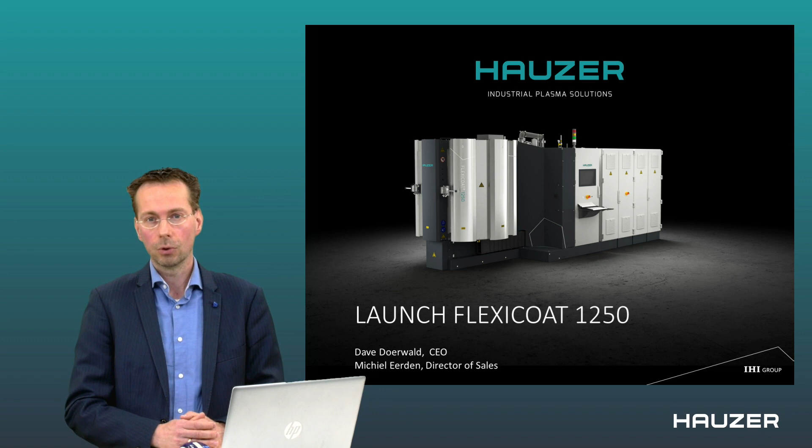Today this is not possible, unfortunately, but we hope that in this way, with this webinar, we are able to introduce today the latest member of our Hauzer Flexicoat family, the Flexicoat 1250. So we would like to introduce this system today.

First, we will start with some introduction and some words by our CEO Dave Doerwald, after which I will say a little bit more about the reasons why we came to the development of the Flexicoat 1250 and the specific features of the system. So with this, I'd like to give the word to Dave Doerwald, who will give a little bit more words about Hauzer and a warm welcome from his side.

Thank you, Michiel, and also a warm welcome to everybody from my side. Really excited to have you here this morning, joining us for this webinar, where we would like to present our latest equipment platform, the Flexicoat 1250. Normally we would present this new equipment to you in one of the many conferences that are happening during this time of the year. Unfortunately, this is not the case, so we have looked for alternative ways to introduce the new technology here today.

As we all know, COVID-19 has a big impact on our lives today, all over the world. We are restricted from traveling, from meeting customers, from social interaction, and therefore I'm happy today that we can use new technologies here to be able to be close to our customers. I would like to thank you all for all the hard work and the efforts that you put into overcoming this virus, and especially also to the healthcare and critical businesses that make it possible to guide us through this situation. And hopefully we will be able to meet again face to face very soon, so that we can have open and constructive discussions also about this new platform.

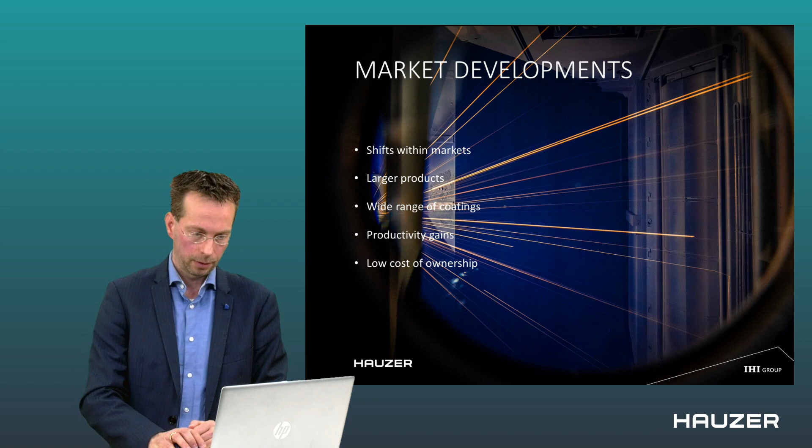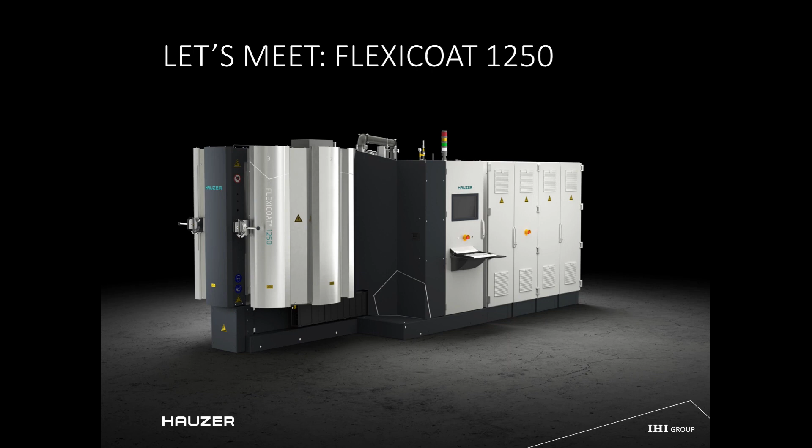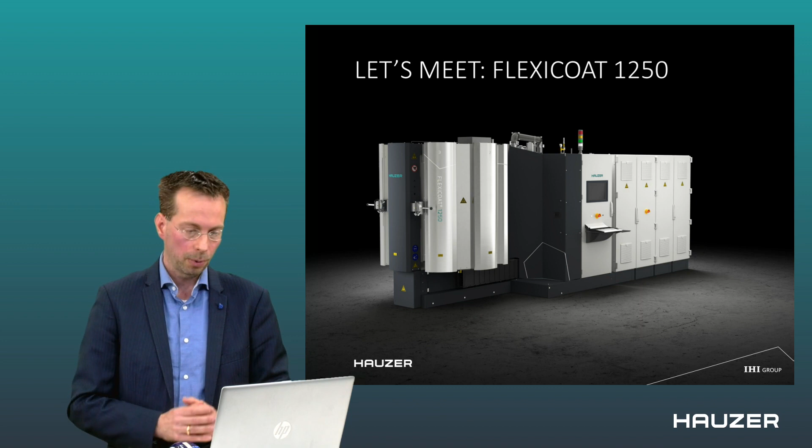It has maybe a somewhat similar look and feel to the existing Flexicoat series 1200, 1000 and 1500 machines, but there clearly are some differences, and these differences I would like to explain in somewhat more detail in the next couple of slides. The first of them is this one. What you can see here is our vacuum chamber. And this vacuum chamber again has a very high amount of flexibility.

What you see on this picture is that for each cathode position we can choose a certain flange. It can be a rectangular flange to make sure that we can use sputter cathodes, we can use rectangular arc, we can use 4 or 5 circular arc cathodes. We also have dedicated walls with 4 CARC+ cathodes to make sure that you make a dedicated machine. For the first time ever, we have an option to build a 7th cathode.

What you're looking at now from the front side is the turbo pump side. On the opposite side, again, we can have a flange. And this flange is available for additional technologies. What you see here is the vacuum chamber. It also means that if you choose a certain configuration today, it doesn't have to stay that way. We can always, like you're used to from Hauzer, upgrade systems with new or different technologies in the future.

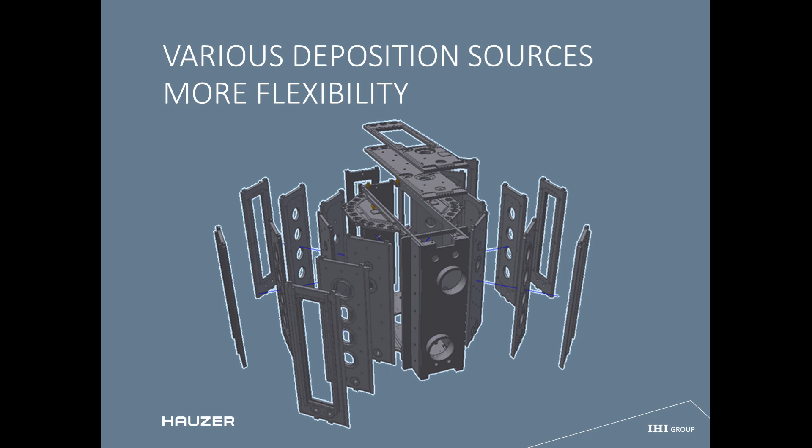A special thing you see here is that on top of the chamber there are 2 options. There is a closed flange, but there is also a flange with an opening, which enables us to add a new feature in our system that I will introduce a little bit later, which gives another productivity boost to this system. Configuration: make sure we are flexible in the way we can build the machines. That's daily business for us, and I would like to give you some examples of how we can do that.

First, for example, if you look at the decorative market, what is important in the decorative coating market when you think about sanitary hardware, door hardware, spectacle frames? Many people would like to make sure they can make a wide variety of different colors. This is pure fashion. So today in the industry, people like red gold, they like deep black. Many years ago it started with brass, then it went to nickel, so you see a gradual change in this fashion. People like different colors in different ages.

In the setup we have chosen here, this would be a machine with 4 rectangular arc cathodes and 2 sputter cathodes. This allows us to make all the typical colors that you are used to from us, from brass to gold to red gold, etc. with the arc. With the arc technology we can also make sure that these coatings can be made at low temperatures. So we also enable the deposition of coatings on ABS plastic parts, which are very typical for faucets or for shower heads mainly.

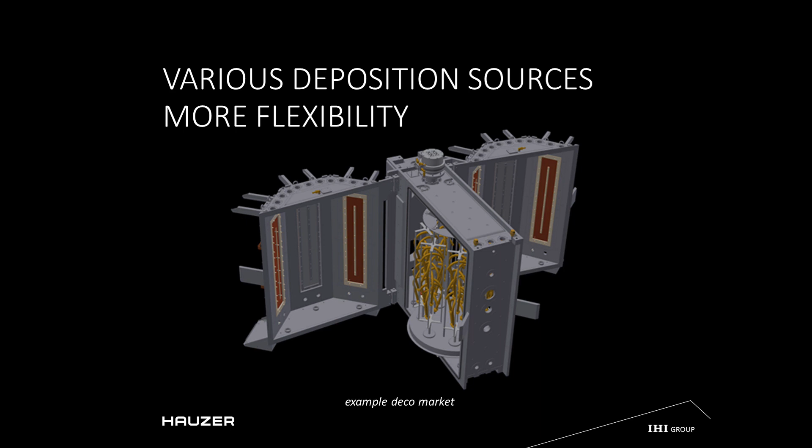We also add in this case sputter technology, and the sputter technology enables us to make deep, dark, black colors, and something special which we have been working on for some time, which is now maybe a little bit more interesting, is the antibacterial coatings. I don't want to claim that the antibacterial coatings we can provide are able to kill a coronavirus, but they do kill bacteria. That's been proven. So in this age where hygiene is really of importance, these antibacterial coatings can be quite interesting for you. And this can also be made in a system where we have the possibility to add these different technologies in one machine. This is one example for decorative coatings.

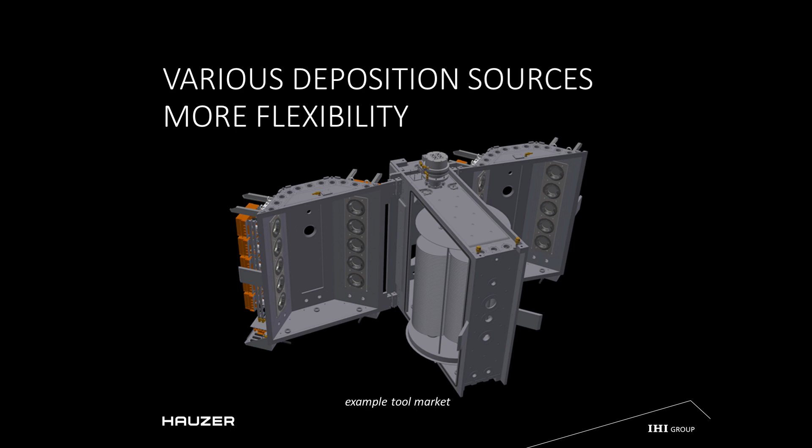If we go to cutting tools or forming tools, here we see an example of a system for saw blades. But it could also be forming tools on the table. And here we see banks of circular arc cathodes. These cathodes enable us to make all the typical nitride coatings that are used in the industry. It also enables us to make TAC, the tetrahedral amorphous carbon coating, which is used for cutting and forming of lightweight materials such as aluminium, which is a trend in the industry.

It also enables, like the other systems, to do both plasma nitriding and PVD coating in one and the same batch, one and the same cycle in the same machine, which is really of added benefit to forming tools that are under high load, where they need high load bearing capacity.

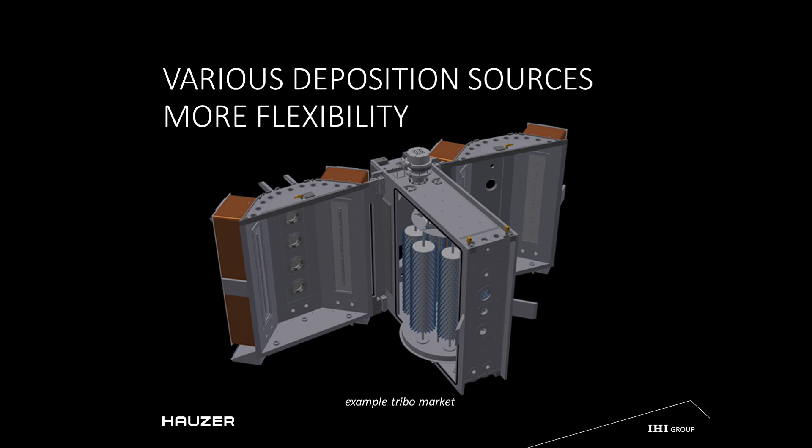This is one example. When we go to tribological low friction coatings, this could be one of the configurations you could choose. This machine here has 4 sputter cathodes and 1 bank of CR+ cathodes. With the sputter cathodes we can make all the typical DLC coatings, tungsten carbon, tungsten DLC, DLC, silicon DLC. When we add HiPIMS technology, we can actually make HiPIMS TAC coatings, so very smooth carbon coatings. And with the bank of CR+, we can again make the typical TAC coatings that are already used in the industry nowadays on automotive components more and more.

So this shows you some of the flexibility we have to offer with this new platform, and I have not even addressed the capability of adding the 7th cathode position, which in this case, for example, could be used for microwave sources, which again add a new technology to make diamond-like carbon coatings with specific advantages that we could discuss in a later stage in more detail.

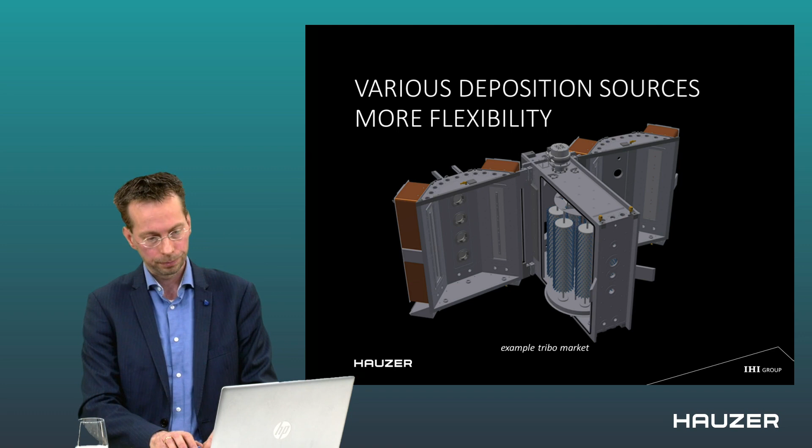I also mentioned the flange on top of the machine. The reason for this flange is that we can add a new feature, which we sometimes call retractable. When you think about depositing coatings on components that have a certain temperature sensitivity, so they should, for example, be coated at low temperature, like for TAC, you'd like to have the maximum amount of cooling capacity in your chamber. We can add cooling panels on the outside, but with this feature we can also add them in the center of the machine.

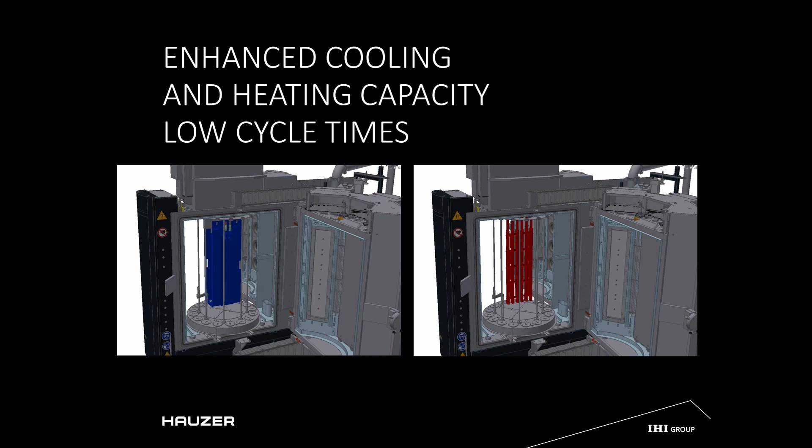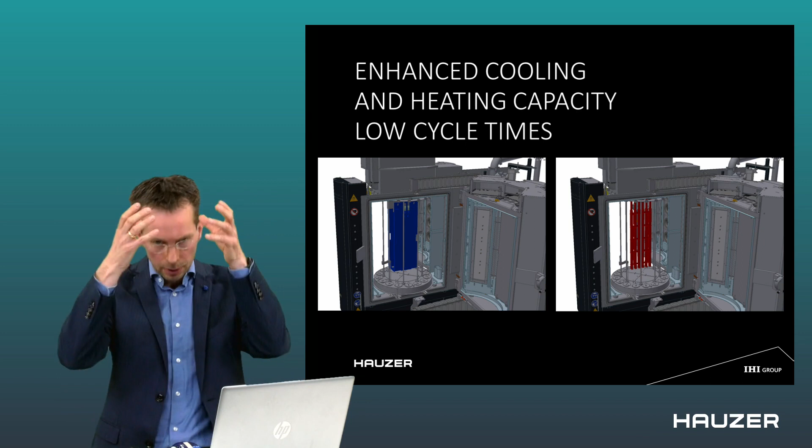However, we cannot only use cooling panels, we can also add heater panels in the same position. So during the first step of the process, where you need to heat up the load and make sure everything is degassed, the heaters will drop down, as you see on the right side of this picture. During the deposition, when you want to make sure you remove all the heat which is dissipated, coming from the plasma, the heaters go up and the cooling panels come down. And this leads to additional productivity, lower cycle time, lower cost of ownership. And that again is the crucial thing here for this new Flexicoat 1250 system.

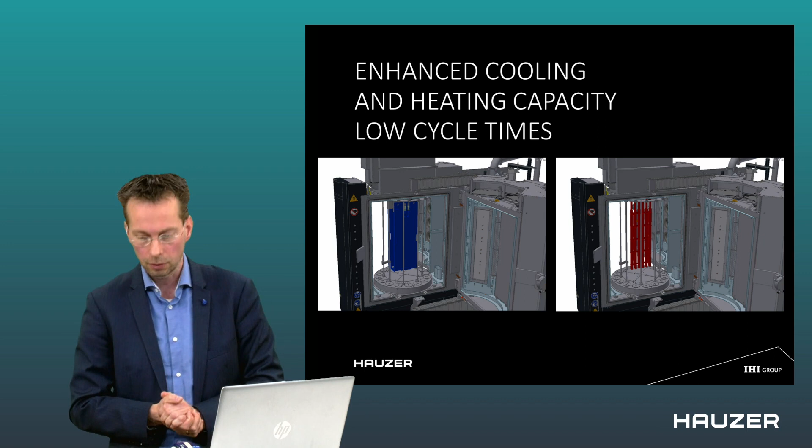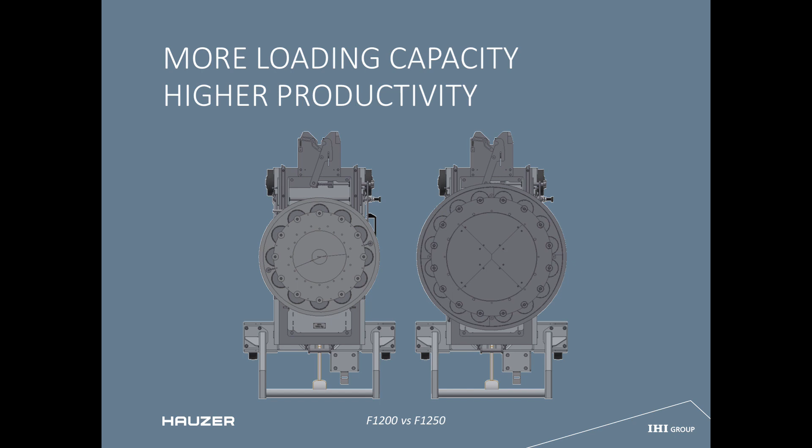But because we can scale up the deposition power, the heating power, the cooling power, we can keep the cycle times the same, and in some cases even reduce cycle times with the retractable in order to have much better cost of ownership. And that's finally where you need to make your money. Being a job coater or being an OEM, this is what makes you money. And that's where we try to contribute again with this system.

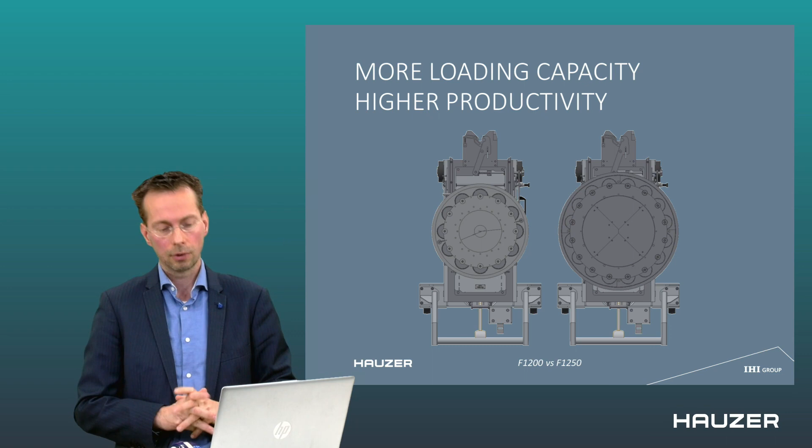So low cost of ownership, that's the key to this new system compared to our Flexicoat 1200 machine. And this low cost of ownership is not only in the system itself and the technologies and the powers; we've also taken it into account for things like maintenance, to make sure shielding exchange is simple, and that when you want to do maintenance or repairs, everything is handled in such a way that it's easy to reach.

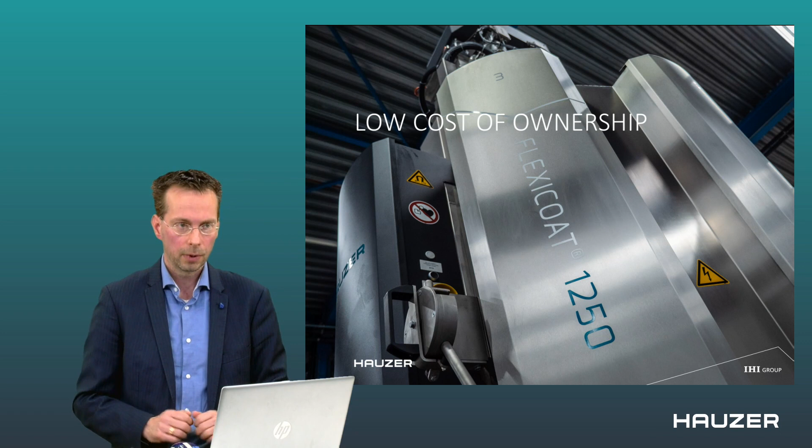This has all been taken into account in the design phase of this machine. And with that, I'd like to take you on a virtual tour of the machine. We cannot show you the real machine today, unfortunately, this is just not possible. But what we can do, we can take you on a virtual tour of the system. So I will show you. This is our image of the Flexicoat 1250, and I'd like to show you a little bit more about the machine.

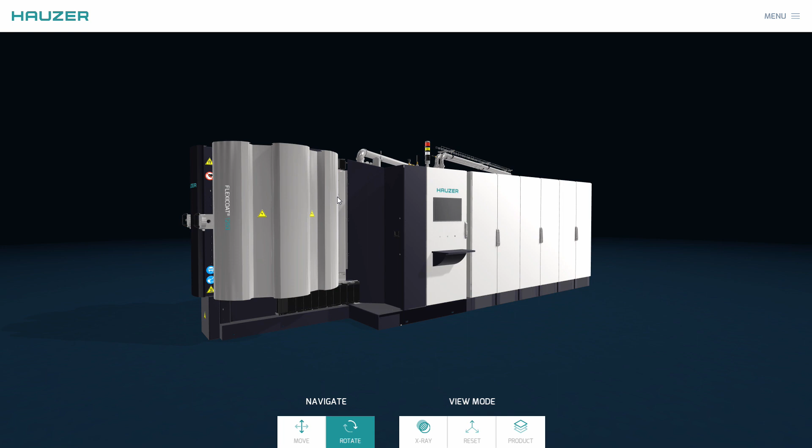So here you can look at the system. We have the vacuum chamber. One thing which is special for this machine, which you saw a little bit on the pictures, is that the doors are opening to the other side than before, which makes sure that the machine is easier to load and unload. And that's one specific item we have changed.

When you look at the top of the machine, you can see we have a nice wide area where you can stand to do maintenance. This optional shielding here has a wide opening door, so you have easy access. If you need to do maintenance on a pump system or the cool water system, it's easy to do.

Simple. When you look at the cabinets, they have a certain layout now, but this layout is flexible. The cabinets can be placed in different directions, so if you have specific layout requests from the factory where you're located, we can typically accommodate these questions from you. So please, if you have questions, don't be afraid to ask also after this presentation, and let us know how we can assist you.

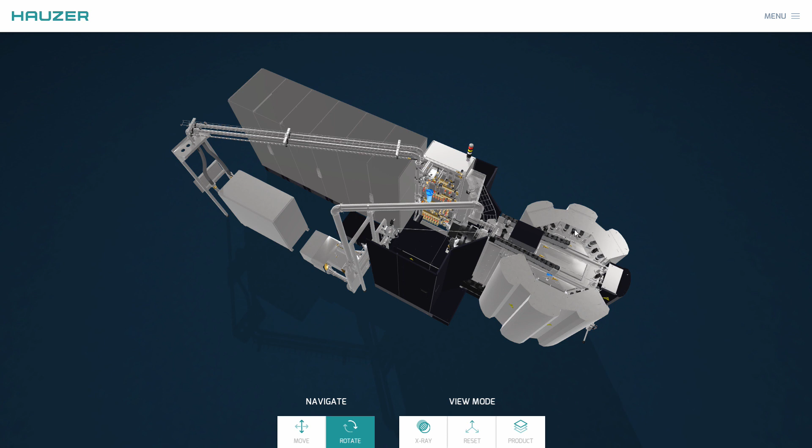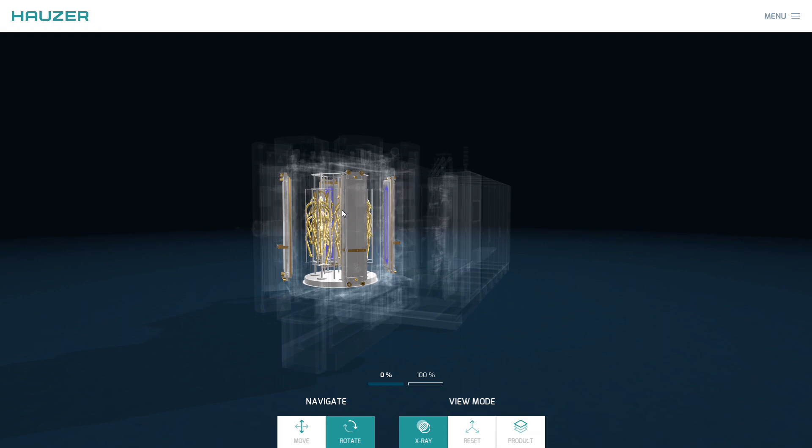I'd like to share a little bit more about the inside of the machine. So here we go. And now we can look at the inside, and this is where, let's say, the magic happens. And here you see one example of a decorative coating. Again, you see the same picture like we had before, where the faucets are rotating in two-fold rotation on the table. And here we have an example of sputter cathodes, where you can see the sputter cathode is running, but this could also be an arc cathode, and running in this way, we can make all the different colors that we have available in our machines. This is one example of the decorative coating.

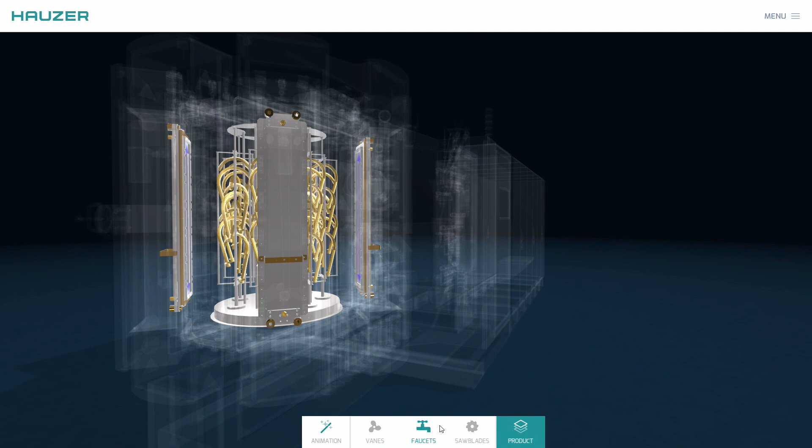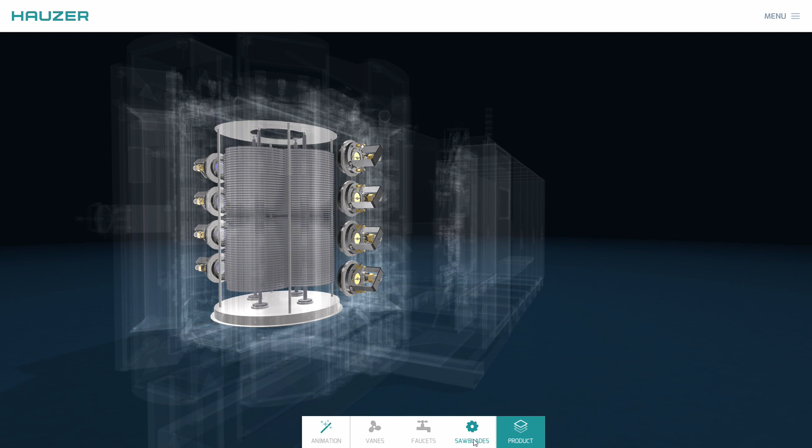If you go to an industrial component, this would be one example, where we have vanes in the system. Still we have the sputter cathodes. We can combine it with the bank of CARC+ to make ta-C. We combine it with PACVD technology to make diamond-like carbon coatings. And when you go to saw blades or forming tools, here we see another configuration, where we have, in this case 4, but it can also be 5 CARC+ cathodes running and depositing a nitride coating on saw blades.

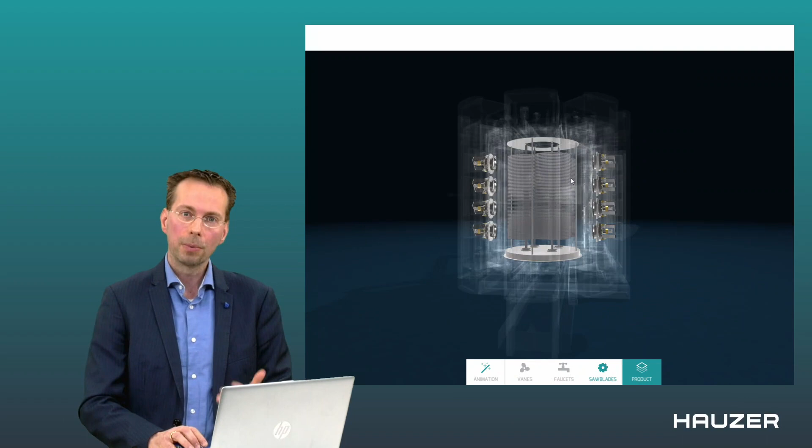So this shows you a little bit of a virtual tour of our machine and the way it's working. I hope it has clarified more details about the system that we have today. And with that, I'd like to finish the virtual tour. And like I mentioned before, if there are any questions, let's see if there are some questions that arrived, and Louis can bring them to us.